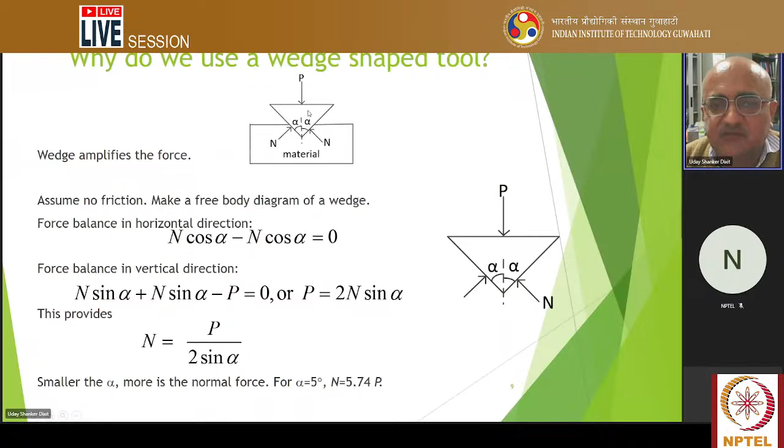This was already told to them, I think. This is syllabus and books etc. Okay, then there is lecture 1, this one. Stop sharing, okay, hide. This is about machining definition, additive, subtractive. Our focus is on machining. Then we are telling that the cutting tool is a wedge shape tool, like a wedge. Why do we make it a wedge shape? So that the force gets amplified. I am putting this one.

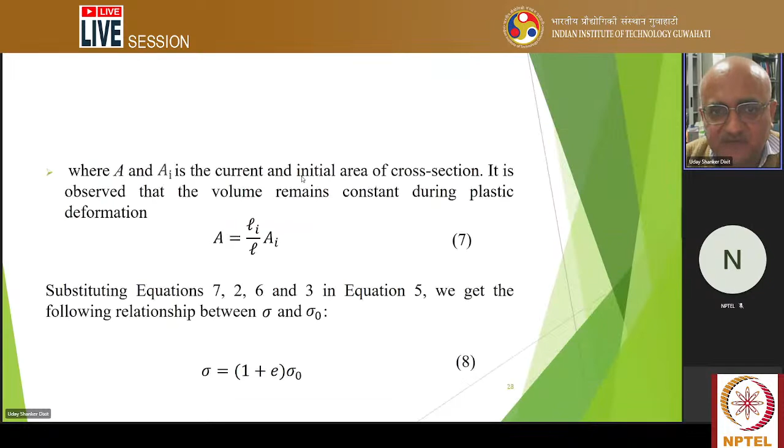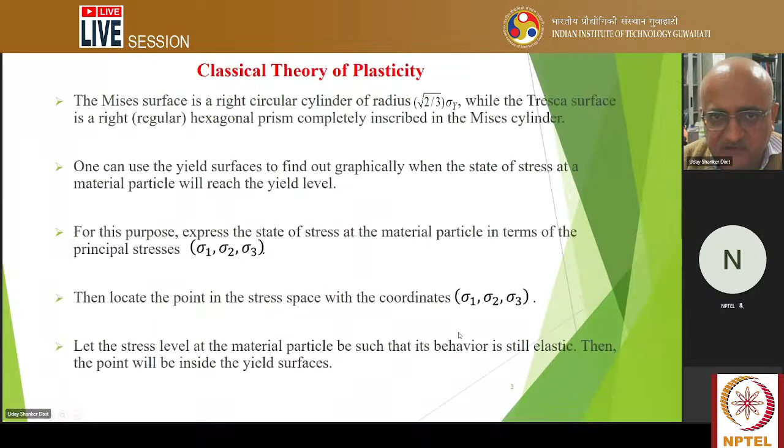What is mechanics? Yeah, this type of thing, how you change engineering strain to true strain. This type of formula has already been covered, and they have done an assignment based on this. Right. So this is one thing. Then we go to lecture 2. In lecture 2, it was about some basic concepts of plastic deformation, because naturally it is taking plastic deformation only. Okay, so plastic deformation is like this. Dislocation, screw dislocation. This is what has been covered there. So then finally lecture 3. Lecture 3 has been covered.

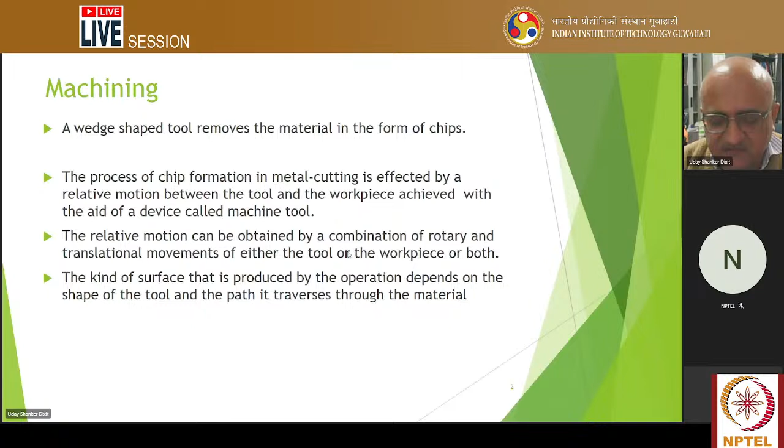Machining classes. This is single point, multi point, straight turning, broaching tool. Then this is the concept of generatrix and directrix. Because suppose you have got a tool, and the tool is moving in this direction, and the feed motion is here. That means generation motion. That means cutting velocity is along this direction, and feed is along this direction. Then it is moving, and it will make this type of surface.

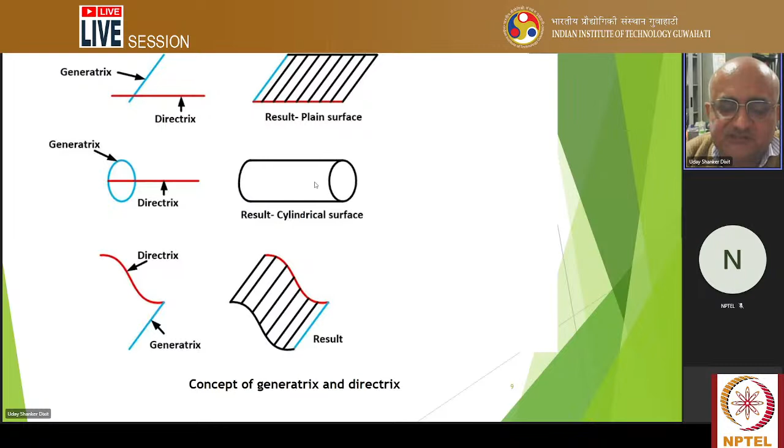Similarly, my tool can move in a circular path. Actually, the tool may remain stationary, but the whole thing will be moving, so it is like a circular path. And simultaneously, you are giving the feed by means of directrix. So then you are getting a cylindrical one. And the direction of line motion is in this direction. And this is inclination angle. It is inclined here, so the cutting edge is inclined with this direction, basically the y direction. That means this is the velocity.

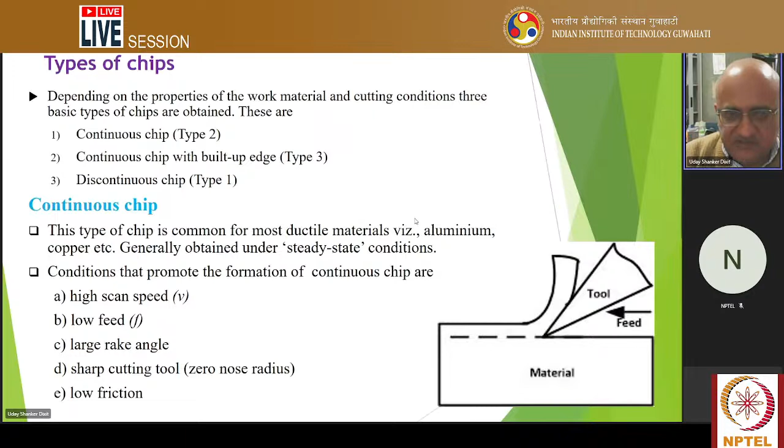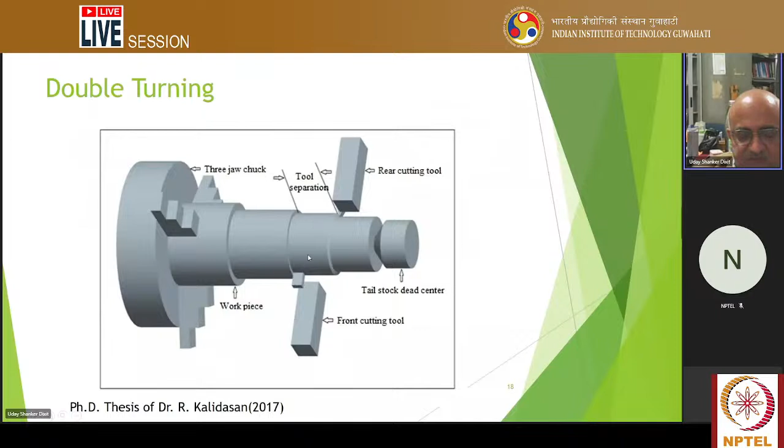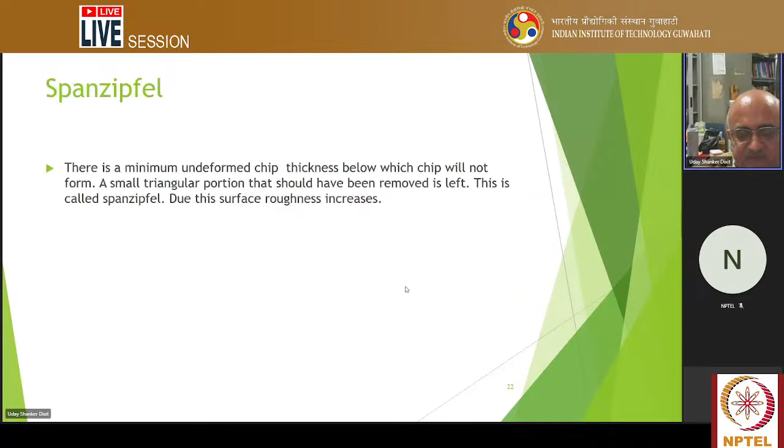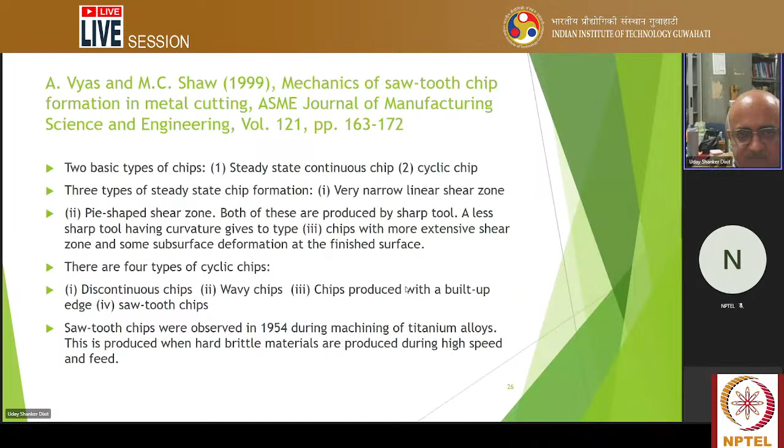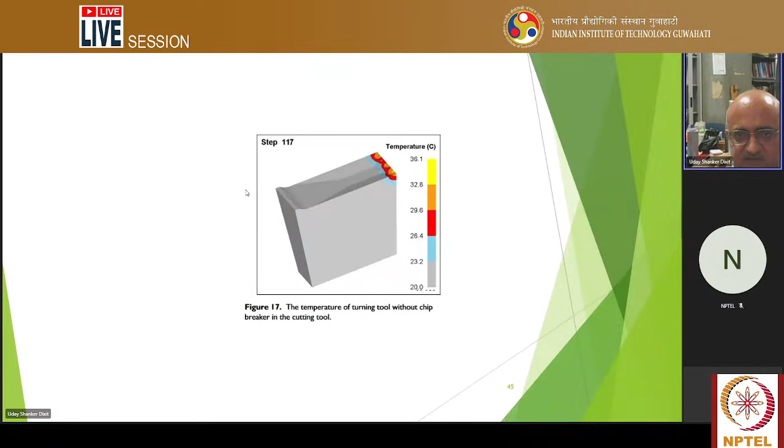Okay, this is lecture 3. Then similarly we can go to lecture 4.

That is about tool geometry, very important because understanding the geometry. But let me meantime see if there is any question. If there is any question, then we can answer. Okay, no, there is no question, but there are maybe two or three persons here. Okay, similarly here, nobody had joined from the main one.

This is tool geometry. Tool geometry is this one.

We are cutting basically by single point cutting tool. These are carbon fibers, cutting speed, and you are cutting like this. Composite material can also be cut. So that's what we are showing here. That is cutting speed.

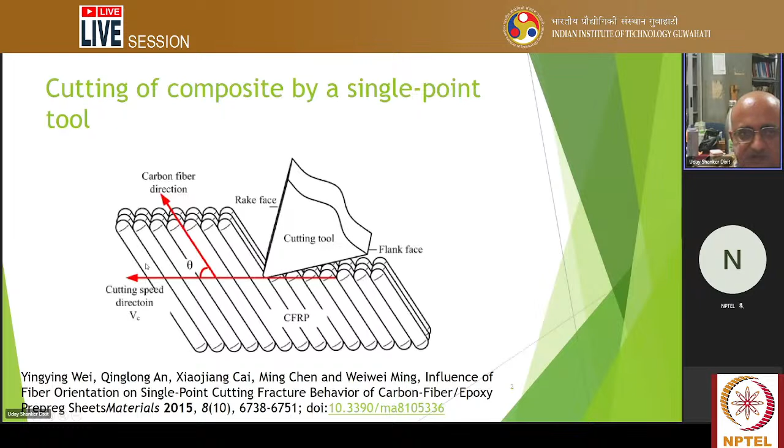This is the rake face. In the rake face, you get a crater wear. Crater means basically a pit, gadha. So that means this is created by this one.

Sharp cutting edge is this. One point has to be seen: this is called single point cutting edge, because primarily this edge is cutting, the other edge is not cutting actually. So here if we say this is the main side cutting edge, this one, and this is the end cutting edge, then we can say this is the flank wear.

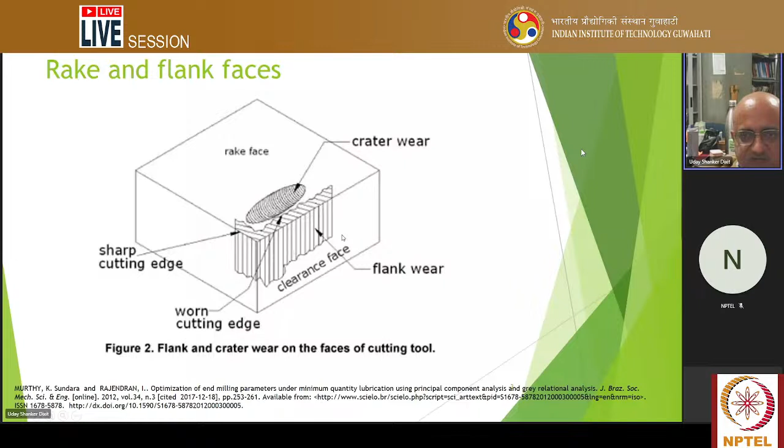Suppose primarily only one edge is cutting, then it is single point cutting. But if both edges are participating, then it is not fully single point turning. Maybe with assumption you can say it is like that. And the flank wear you get on that flank surface. That's what you are getting: crater wear and flank wear.

So now we have the principal cutting edge, main cutting edge, and this is the auxiliary cutting edge. This is the auxiliary flank face, and this is the principal flank face. Flank means side, and nose and shank and all those type of things.

You make 3 views so that you can show the 6 angles and 1 nose radius. So nose radius will appear in the top view. Top view you have got, and this is side cutting edge, and this is end cutting edge, and this is end relief angle. This is back rake angle.

This is side rake angle, and this is side relief angle here. Side relief angle, it is just going a little bit down. That's why you are getting like that.

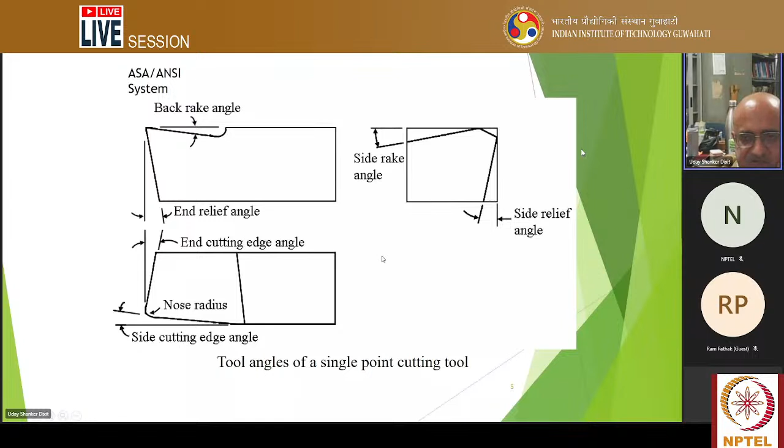So we make tool signature. In the tool signature, we have to show all these things: back rake angle, side rake angle, end relief angle, side relief angle, end cutting edge angle, side cutting edge angle, and we get nose radius. This is as per American Standards Association.

And in the orthogonal system, we have a different system. First, we take one reference plane. Reference plane is perpendicular to the velocity vector, that means it is this one. And cutting plane is that plane which contains the cutting edge, that is, the cutting edge is contained in that.

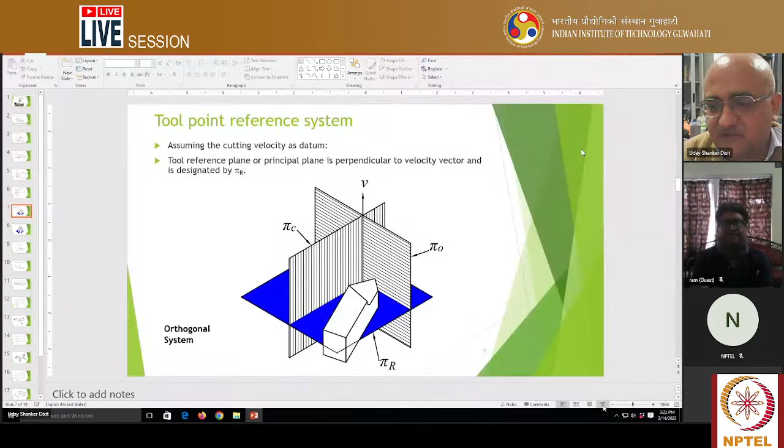Okay, here you have this one, orthogonal system. This is oblique or normal reference system. So in oblique system, one plane will be the cutting plane - that means it contains the cutting edge, but also contains that plane which is normal to the cutting edge. So therefore there are some differences. I have already taught you in the video about the angle conversion from one system to the other system.

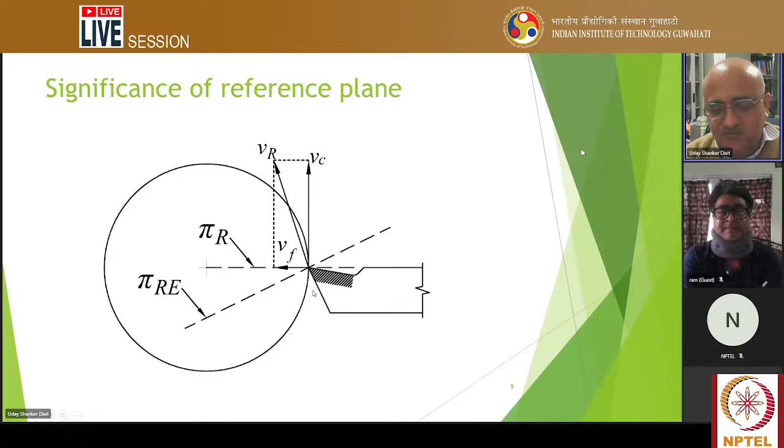Here I am highlighting that suppose precisely if cutting velocity is this, but you have some feed velocity also, then the resultant velocity will be like this. Actually the reference plane we say like this, but the effective reference plane becomes like this because it is perpendicular, so some difference is there. Some amount of change in the rake angle occurs if you set the tool above the center or below the center also. That type of thing is also there - that's what I have illustrated here.

Okay, so we are having the tool nomenclature system, but in each system you have to have 6 angles, and nose radius is common. So nose radius is common, right?

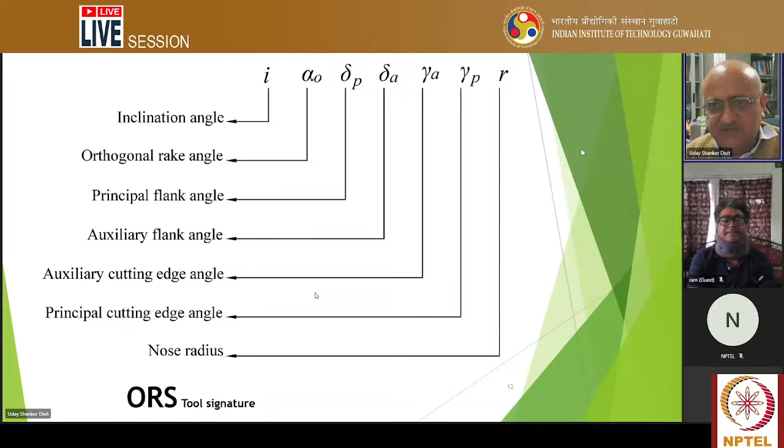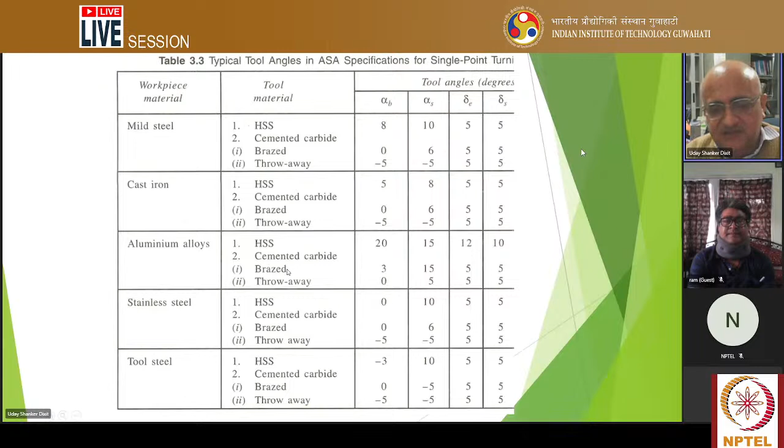This is the maximum rake angle system, because in the ASA system you have got side rake and back rake, but the maximum rake will be different actually. That maximum is in the direction where you get the maximum slope. So that formula also I have written to you, and these are just typical angles in different materials. This has also been covered - this much was covered up to lecture 4.

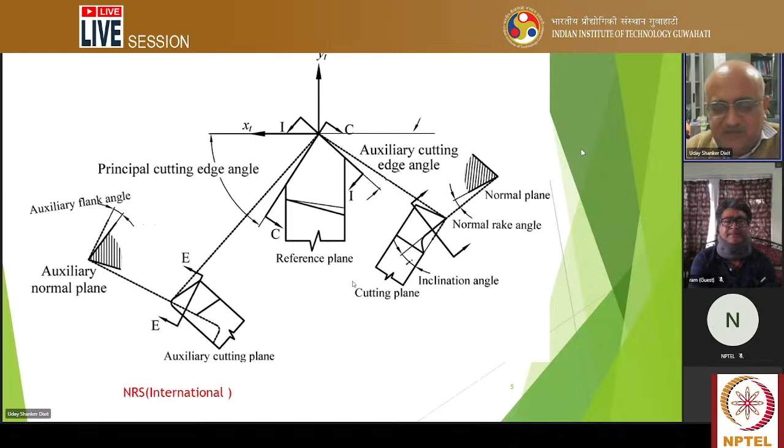Let me just go to lecture 5. I summarized that in the video, and then you can ask any question here. Conversion of two angles - how to convert the two angles? ORS, the maximum rake system, is the British system. NRS is called the international system. Although it is called the international system, practically everybody now follows the American type of system, which is more common, but you may have some books or something. So that's what I am showing - different types of relations.

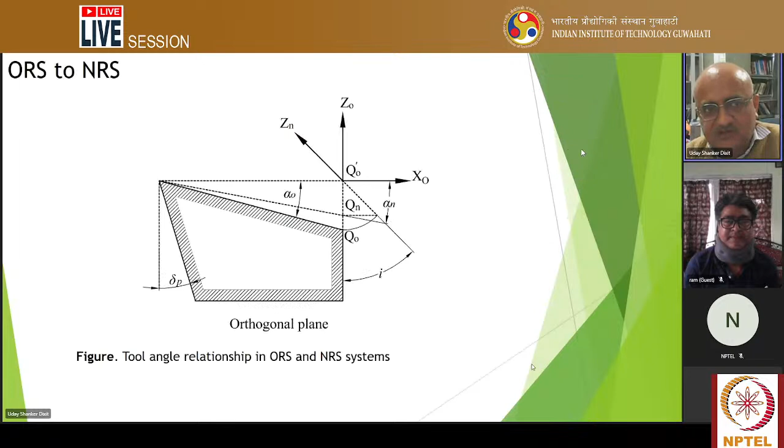Tan I is equal to this one - say suppose converting one system to the other system. Inclination angle, how do you find out from here? In orthogonal machining, inclination angle will be 0. ORS to normal rake system - normal rake angle tan alpha n is equal to cos I into tan alpha o. These are the formulae, and of course there is some mathematics, trigonometry involved.

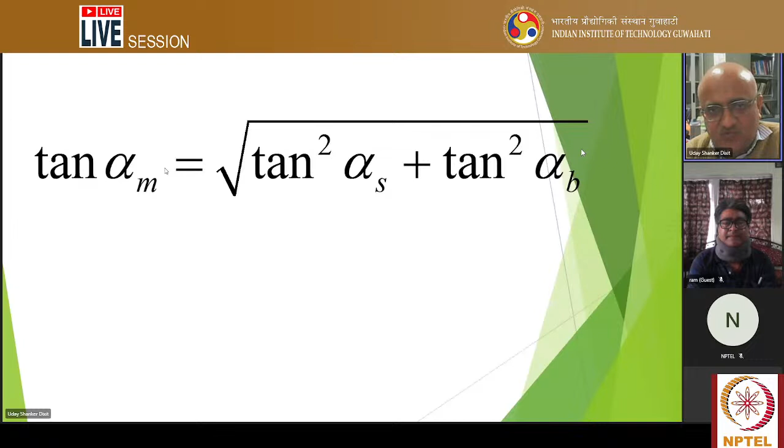This is the maximum rake angle: tan alpha m is equal to under root of tan square alpha s plus tan square alpha b - that is side rake angle square plus back rake angle square. These two things are very important, and this is what it goes to.

Yes sir. Sir, in cutting insert, if you see the cutting insert, we cannot find - meaning the tool geometry is not like the conventional single point cutting tool. You mean to say there are some grooves and something like that? In the insert? Yes, insert.

No, basic things are same, but they may have some little additional things also - basic angles are there. But what happens is the insert has to be mounted, and after mounting you have to see the angle. The tool may be anything, but it depends on how you have mounted it. But as such, angles are not able to be seen probably because some of those angles will be very small - say for example side rake angle may be 0 actually, so it will not be visible to you. Is it not?

But anyway, let us go to that. Now I am going to lecture 6. I have covered, and let me just show you, lecture 6 up to 11 we have covered. This is mechanics of orthogonal cutting, very basic. In practice we don't do that type of cutting, but we are just showing that.

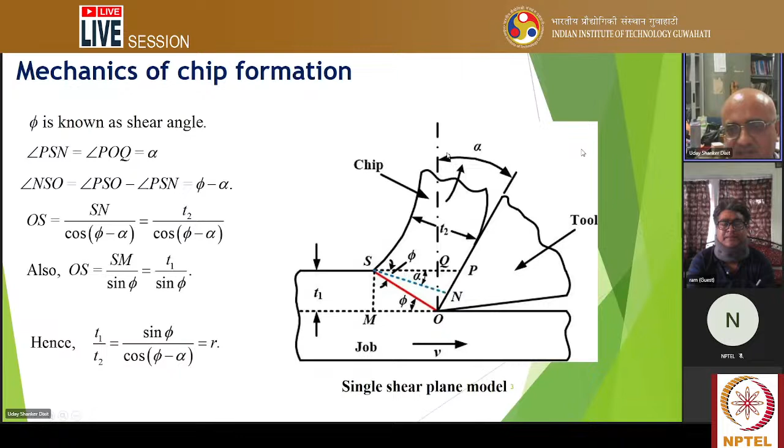Now maybe you may have some tool where this edge may not be completely straight, it may be inclined, and such variations can be there. But the basic thing will remain that this surface has to be inclined with respect to the perpendicular to the cutting velocity. And then you have this one and this, the chip thickness.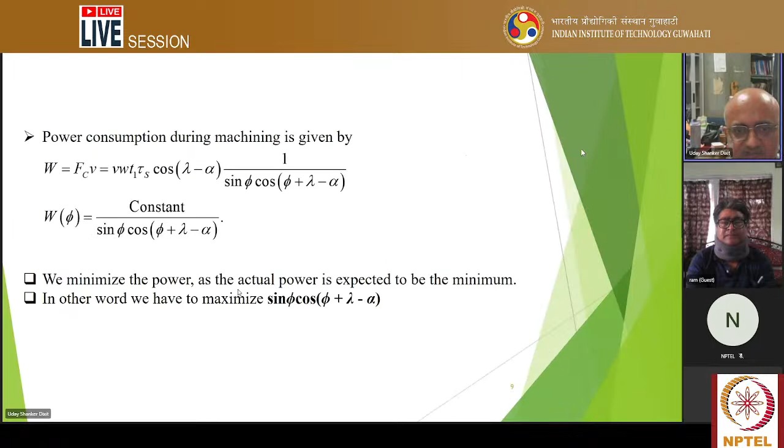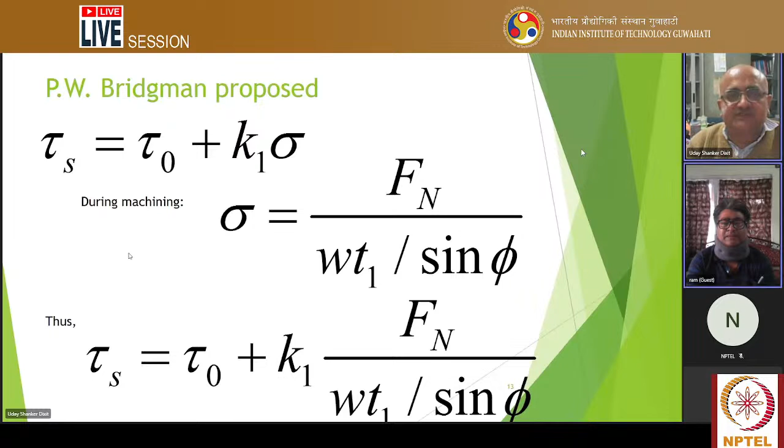So this type of thing was also told, and we have told about Merchant's analysis. This is actually a very approximate model. But Merchant's second analysis was like this: Bridgman said that it is also dependent on how much normal stress is there. That means the stress will change with the normal stress. So he gave this formula. With that, some changes take place, and that analysis has been done. I am not going to repeat that.

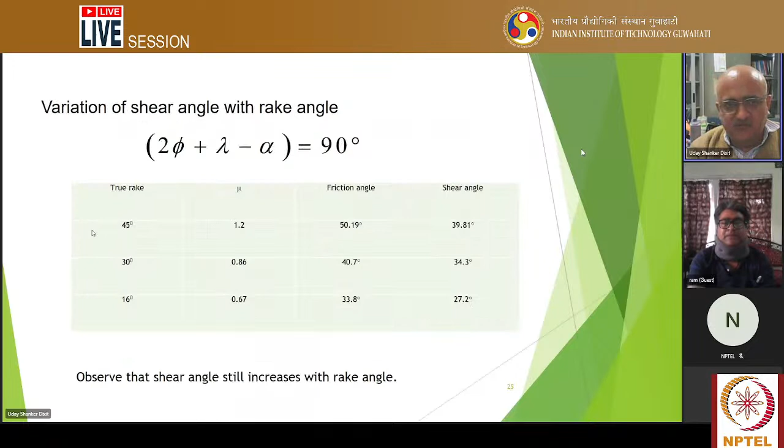These are the problems, okay, cutting force and this one. These are the F by N ratio. We assume Coulomb's coefficient of friction, but in practice it's just an approximation because Coulomb's law is not valid there. Still, we assume that ratio, average force equals tangential force, and this is average normal.

Now this is a very important point, Pathak ji, pay attention to this. I have asked many people, when they are doing turning, whether the feed is affecting the chip thickness or depth of cut. Many people think, because this has been given, that depth of cut is affecting the chip thickness, but it is not so, because cutting is being done like this, in this type of direction.

You just see, therefore T1 is proportional to feed into cosine psi, where psi is the side cutting edge angle. That means you can observe and measure the chip thickness. You will see that basically the chip thickness increases when you increase the feed. Depth of cut is not dependent that much; depth of cut will affect the chip width actually. So this point is very, very important here.

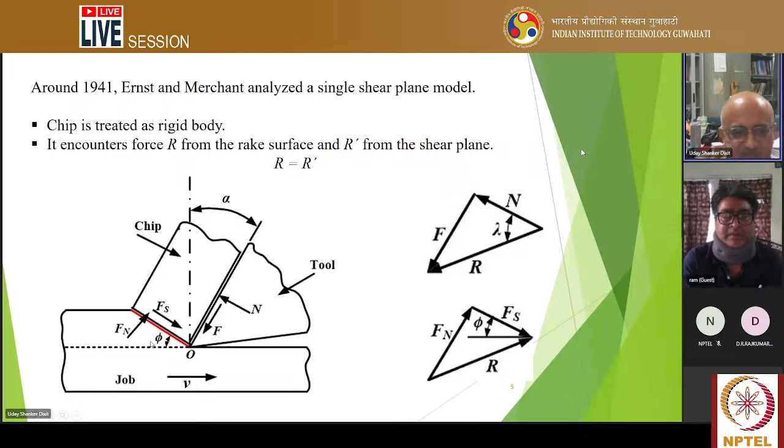So they think that in turning also the depth of cut will decide the chip thickness. But it is not that. Depth of cut doesn't decide the chip thickness; depth of cut will decide the width. That's why this diagram is made here, and these are the conditions for orthogonal machining, and this is feed force and radial force.

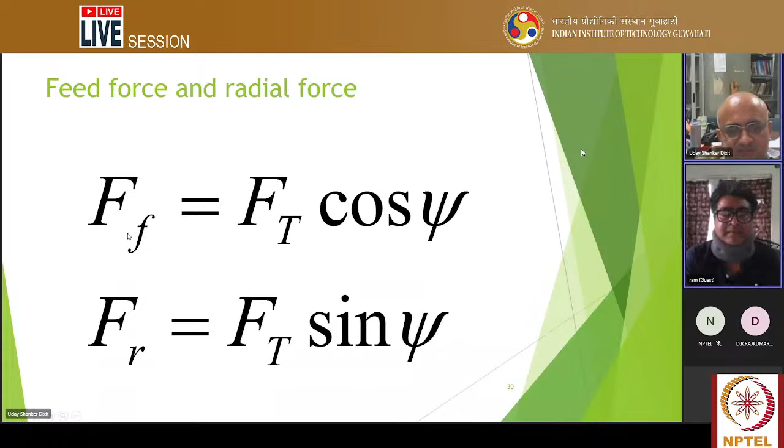So if you are getting thrust force on the cutting edge, we can say that feed force is equal to Ft cos psi and radial force is equal to Ft sin psi. Okay. So this was told in this lecture.

So let me see in YouTube if there is any question. Yeah, Mahmood has already asked a question, and he's from industry. Okay, there are many people watching now. Okay, no problem. YouTube is also where people are watching. Fine. Now I will go to this one.

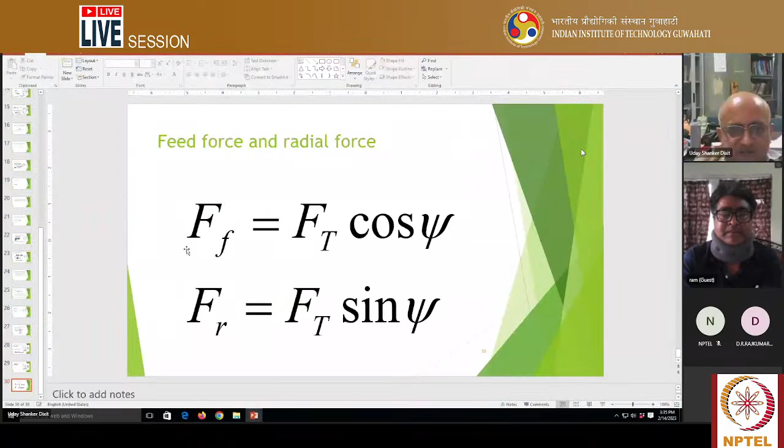Up to 6th we have told? Yes, 6th has been told. And then we have to go to the 7th lecture. This also has been covered. Strain and stresses in orthogonal machining. Force divided by area gives average stress. So here coefficient of friction mu is equal to tan lambda, the friction angle, F by N, and this is how you are getting it.

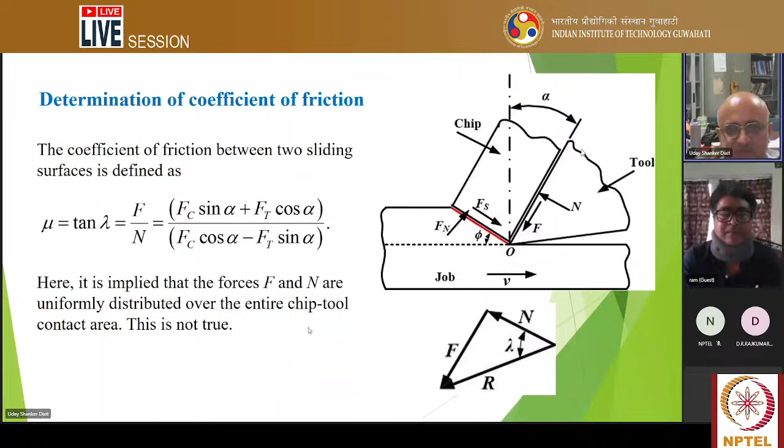And force, but actually they are not uniformly distributed. In practice, you will get this type of situation. Suppose this is the cutting point, and this is the rake surface. Normal stress keeps on decreasing like this, and shear stress remains here. Here the shear stress is very high, but it cannot increase beyond the shear yield stress of the material. So there it saturates, and in this zone it doesn't follow Coulomb's law.

Rather, the shear stress remains constant. It is no longer proportional to normal stress. But after this point, shear stress is proportional to normal stress. So shear stress is actually changing like that. But in a simple model we do not do that type of analysis. We just take average shear stress and normal stress. But this is what one has to remember.

Normally, when normal force increases, friction force also increases. That's what we have studied in school, Coulomb's law, class 8 to 12. But it is true up to a certain limit, when normal force is not very high. The moment normal force becomes very high, there comes a limit, and after that everything becomes flat. You keep increasing normal force, but the friction force will remain the same.

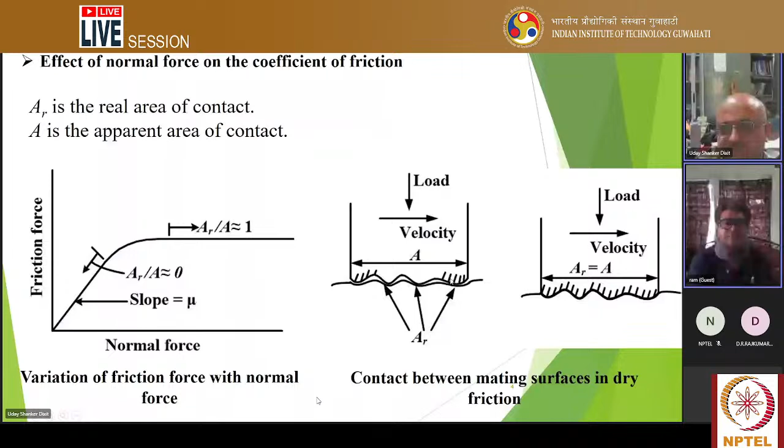And in between there is a transition zone. So that is the situation. There is one Wanheim and Bay friction model that captures this type of phenomena. So this type of thing was told. And then another aspect is there. This is just the basic nature dependent on the load.

Another thing is that friction may depend on the cutting velocity. So F equals F0 Vc to the power p, where p is negative, say minus 0.07. As velocity increases, the friction force decreases.

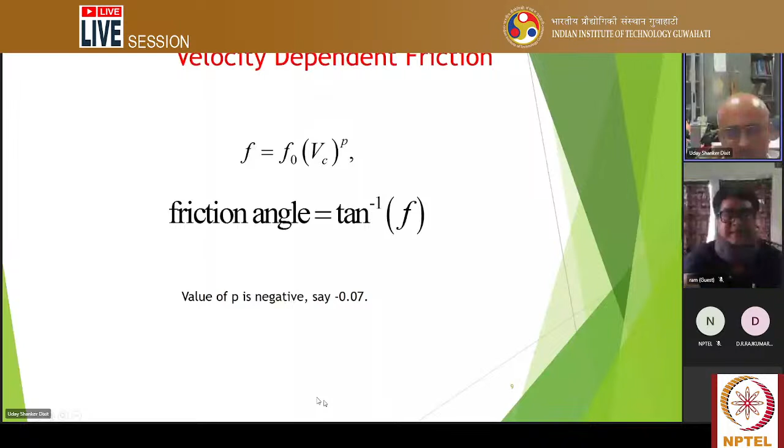Okay, let me just see if it is going on. Okay, fine. So any question? Dr. R. Rajkumar also has joined. Now let me see in YouTube. Anybody asking anything? Yeah, they are watching, but no question till now.

Okay, so up to here we have done. Friction dependency, friction angle, determination of stresses. Shear stress is Fs divided by As. You find Fs by the formula: if you measure the cutting force and thrust force through a dynamometer, divide by the area bt by sin phi, you get the shear stress, and normal stress similarly. So roughly you will get an idea.

And shear strain will be cot phi plus tan of phi minus alpha. Now remember, alpha is the exact rake angle, which is known to you. But phi is just an approximation. You cannot measure it directly.

Unless you put a very high arrangement and you put the camera and then you do some machining, then you stop the machining, then you can measure the phi. But the phi is not measured. Moreover, don't think that the cutting takes place at a line. It will be very blurred, that type of thing. But still we assume that on an average it goes like that. So phi we find out indirectly by measuring the chip thickness, etc.

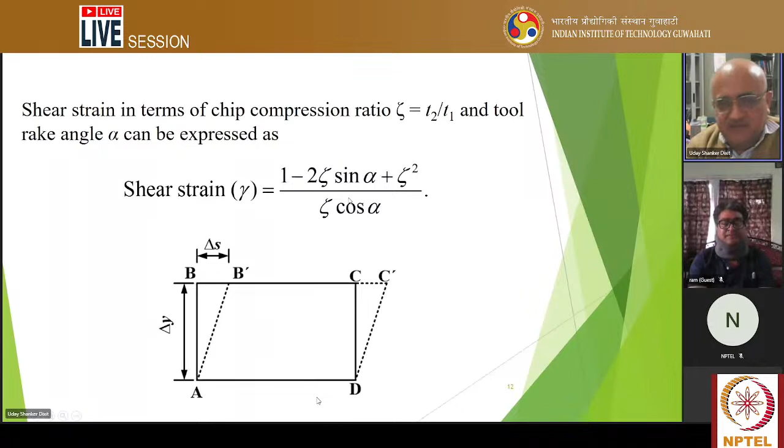And then shear strain is given in terms of the chip compression ratio. Chip compression ratio is the opposite of cutting ratio. So cutting ratio is T1 by T2 and the chip compression ratio is T2 by T1. Tool rake angle alpha can be expressed as this one, and this is the shear strain. So if the chip compression ratio is known to you, then you can find out shear strain. So here this expression has been given, and you can see the shear strain.

Suppose I keep on increasing the rake angle, then my shear strain decreases because of minus alpha. And if the shear strain is decreasing, in a way it is good also, because you want to cut the material. You don't want to create much strain actually. It is not metal forming where you want strain and that will be useful for you. That material is gone. So any cutting process which cuts without producing any strain is better. But minimum strain will always be there. So we are showing how we find out the expression for this.

This is shear strain rate. Shear strain rate unit is per second. So here we assume that the separation between two successive planes is 25 into 10 to the power minus 4. So shear strain rate comes out of the order of 10 to the power 5 per second. In a tensile test, the shear strain rate is 10 to the power minus 3 per second. That slowly you consider. And if an impact test is there, then it will be 10 to the power 3 per second, 1000 per second. That much we can get.

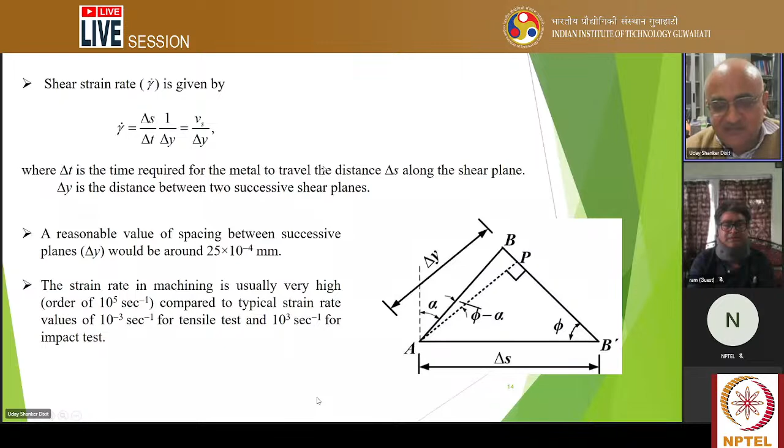But here it is claimed that it is 10 to the power 5. Some researchers I have indicated don't agree to this; they said no, strain in metal cutting is not very high. So if anybody wants to do fundamental research, still this area is open. Anybody can do research here. They just said that in metal the delta Y plane spacing is this much and put that, but nobody is actually seeing that thing. Either you need a very sophisticated instrument and you have to realize the whole cutting process. That is why the scope is very much there.

Chip velocity, shear velocity, this much also has been told. And then this paper I told about has still not come in the textbooks, but it is a paper worth reading. It was published in a very reputed journal, International Journal of Mechanical Sciences, in 2005. It is a very big paper, but very easy to understand. He said what are the problems with the single shear plane model, assuming that the cutting is taking place like this.

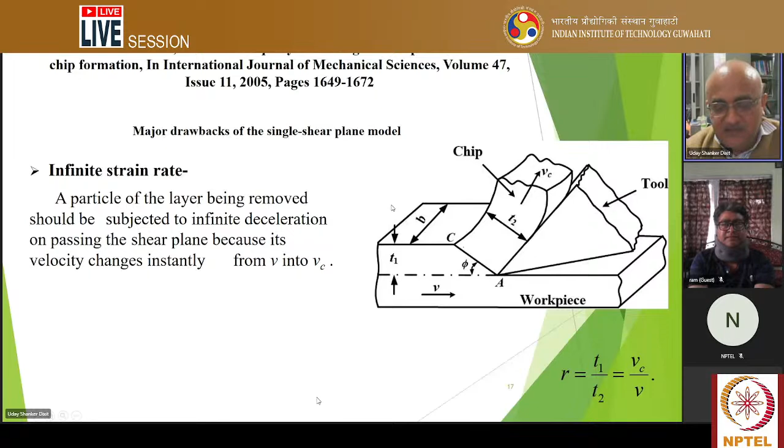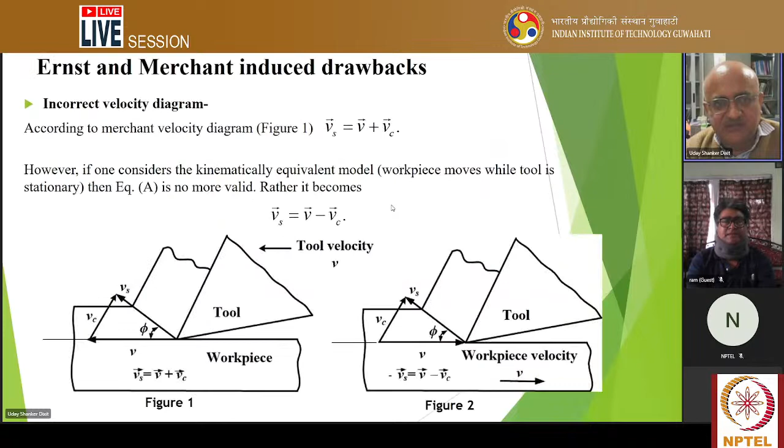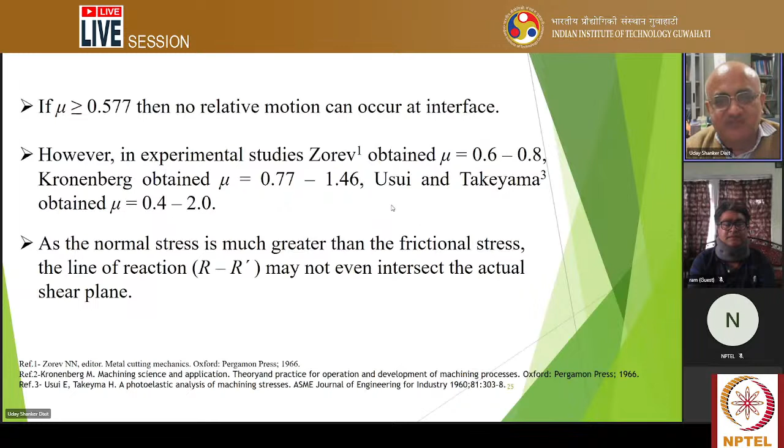He said that it will produce infinite strain rate and unrealistically high shear strain and shear strain rate, and the behavior of the work material is also not proper. He showed a lot of drawbacks, which are contained in the video. And he's saying that the force diagram is also incorrect. And the type of friction model we generally take, although mu should not be greater than 0.577, but in machining generally we take mu very high. So he is supporting those ideas.

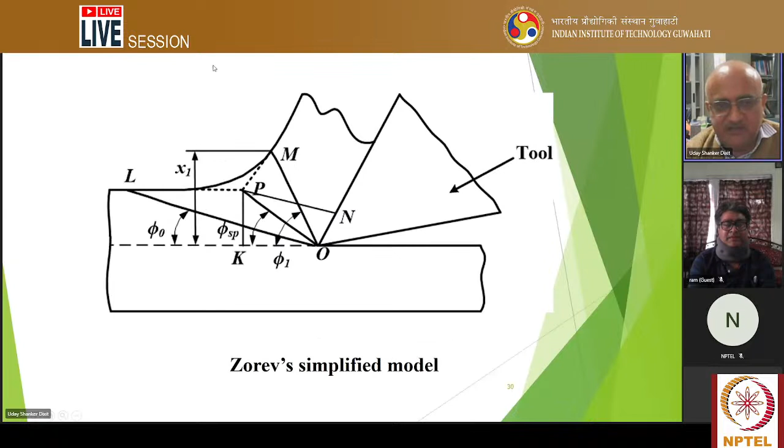Constant friction coefficient, obviously it cannot be constant. There were other people also who did this, like the Briggs model. There he said that cutting is taking place like a fan, in this zone. There is no shear plane, rather there is a zone. And Zorev said that the zone is like this. This is the Zorev model. Then the Zorev simplified model: this is very complicated, so you can simplify a bit and say it is like this. At least you should consider.

So this is the formula: during orthogonal machining with a zero rake angle, shear strain is given by this. Okay, that is given. So this point I have highlighted. A lot of research potential is also there.

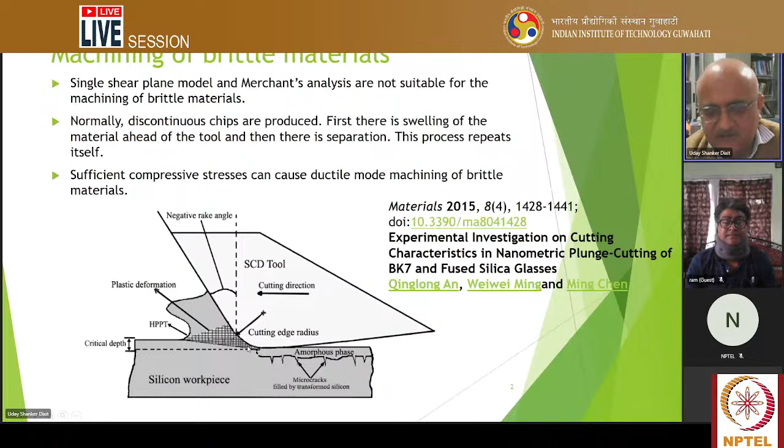If you follow Astakhov's papers, Astakhov has written many papers. He is a Russian but settled in America. He has written many things: experimental study of orthogonal cutting and other models. So there are different models; actually there will be plastic deformation in the cutting zone. So here, how to determine chip formation, how should we do that?

One is that we make circular grids. Earlier people used to do this type of thing. They will make a grid on the material, and after deformation they will see what happened to the grid. Then they used to make circles, and after deformation the circle will become an ellipse. If you want, students can still do such experiments, but this type of research was very popular in the 1970s. Nowadays people are not doing it, but use high-speed photography. So suppose the circle becomes an ellipse, then you can find out the strain like this: E1 is equal to ln R1 by R.

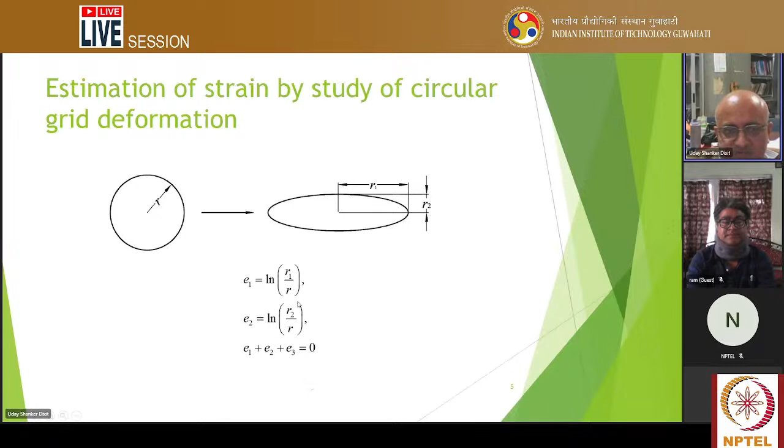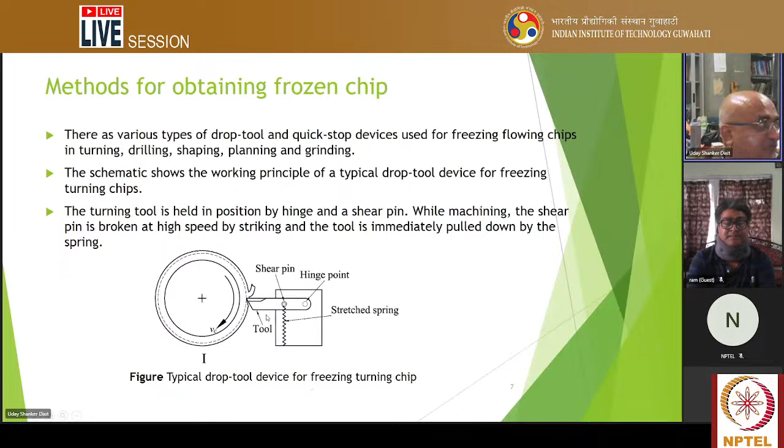Another thing is the method of frozen chip. You are doing cutting and suddenly you withdraw, and then see what happens, how the chip is connected. That type of experiment people have also done. Some people suddenly put a spring here, so with impact it suddenly gets broken and detached. These types of concepts are there. I'm just telling the concepts.

Here he is putting the shear pin. So you are doing machining, and suddenly the shear pin will get broken. So the workpiece and tool will get detached all of a sudden, and then you can see what happened. So these are something like quick stop tests or frozen quick stop operations.

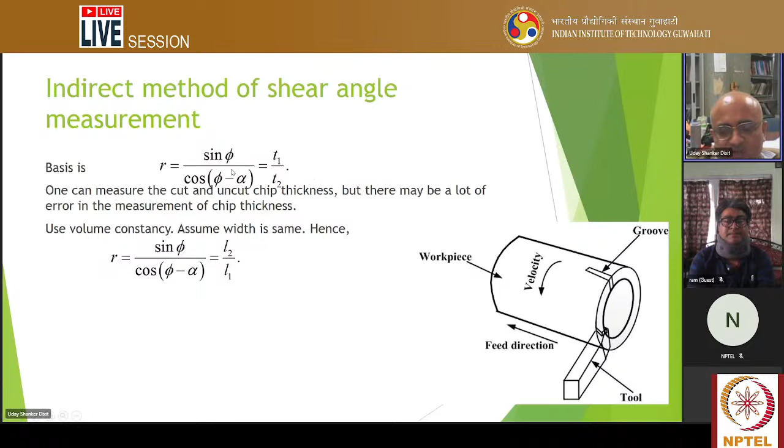An indirect method of shear angle measurement is that you measure the cutting ratio. This is called the cutting ratio, and its inverse is the chip compression ratio, that means 1 by R is equal to this one. So this is the formula. Therefore, if you know the cutting ratio and the rake angle, you can find out phi. And uncut chip thickness you can find by weight measurement also, because in plastic deformation the weight remains constant. So that method also has been told.

We are assuming that the cutting edge is very, very sharp, but the cutting edge may also vary. So Pathak ji asked whether this one is also correct. He said that when I see any tip, I am finding that these angles are somewhat different. So there may be many other features, like the edge radius. Remember, it is different from the nose radius. The nose radius you see in the top view, but from the side you can also see a radius, that is the edge radius, and it may be very small, but it has some effect on the performance.

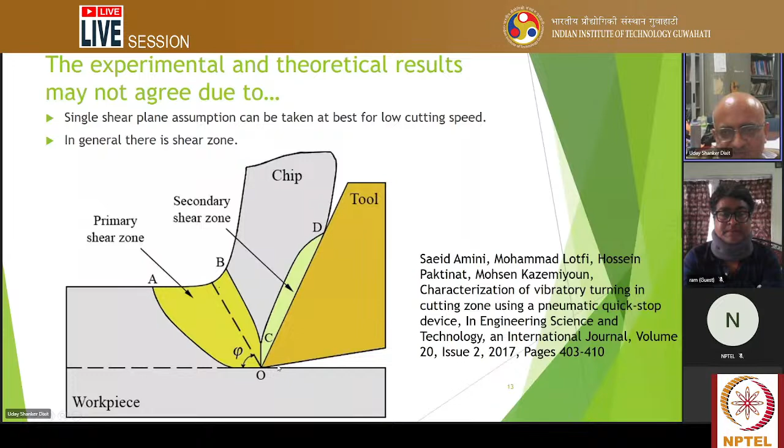And generally in this diagram, this is the primary shear zone. Actually, this is a shear zone, but you are assuming it is a shear plane, and maybe you are ignoring a lot of zone here. And this is the secondary shear zone, where the chip is sliding, and this is the tertiary shear zone, small, at the clearance. So this is the paper, and friction may not be constant at the rake surface. And Atkins' paper is also very useful.

Atkins in 2003 published a very good paper, also in the same journal, International Journal of Mechanical Sciences. Here he says that you do any machining problem by an energy approach. So there is work required for plastic deformation, work due to friction at the tool-chip-work interface, and some work to be done to separate and make a new surface, because the surface energy increases. This type of thing was not added. So he said, add the power for creating new surface, and then it will solve many problems.

I have asked some of my PhD students to do some work using that model, and it was giving good results. That means one additional parameter has increased. But again, there is a scope for research, because it is true that I added this thing and got good results, but it may just be some kind of fitting, because of two things.

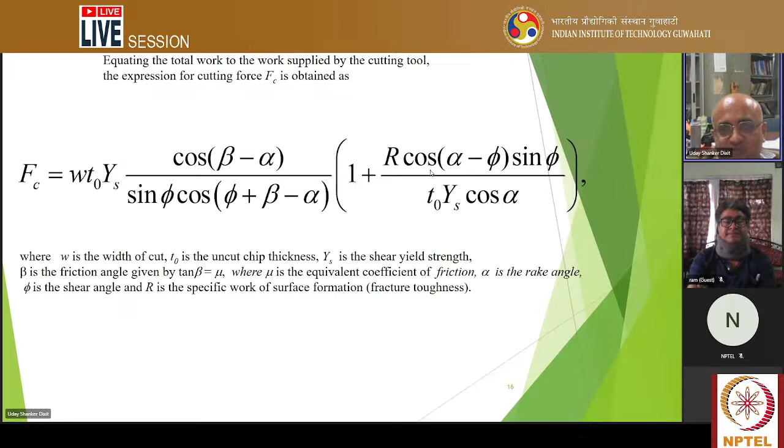Really, whether it is this surface energy coefficient or not, for that you have to do some physics study also. Then models, so energy of cutting. There are some empirical models. People said all these models, they do what? That cutting force is proportional to the feed and this one.

So here it is not this one. It is T to the power A and W to the power B. So it is not that A will be 1 and B will be 1. It may be something. Then I told slip line model. It is a general method for solving such type of problems. Nowadays, not that much popular.

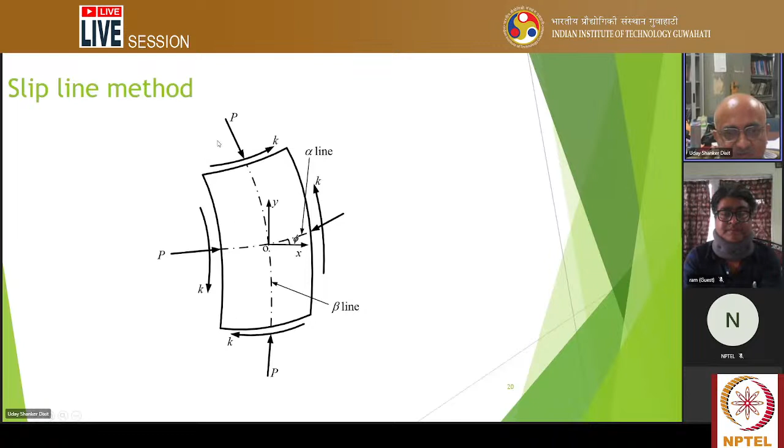Suppose you want to find out the shear stress. Okay, so shear stress K, and this is this one. So they assume that material goes along some shear lines, wherever you get maximum shear, and you get hydrostatic stress there. So something about slip line theory also I had told, which is not taught in the BTech, but I have told that you have to satisfy basically the equilibrium equation, continuity equation, and the rule of plastic flow.

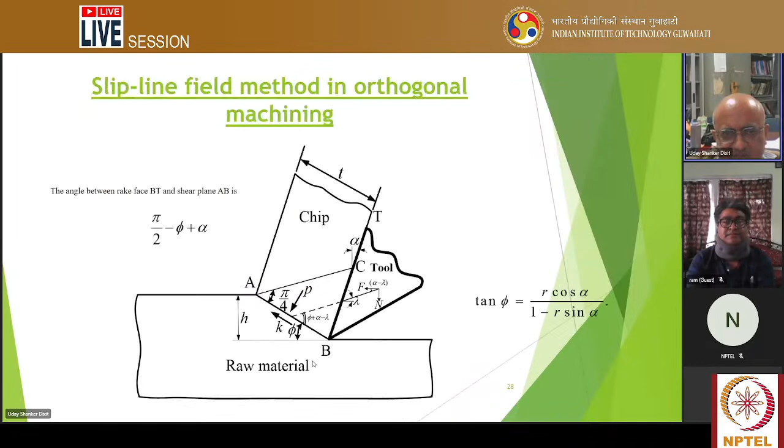Then I told how some analysis can be done based on that. This much I told in this lecture, and this was lecture 8. Then I think I have covered lecture 9. In lecture 9 I covered this topic. It is still the machining. If somebody wants to do fundamental analysis, then in machining the area is quite open, because most of the work people do, but they are not understanding the mechanics.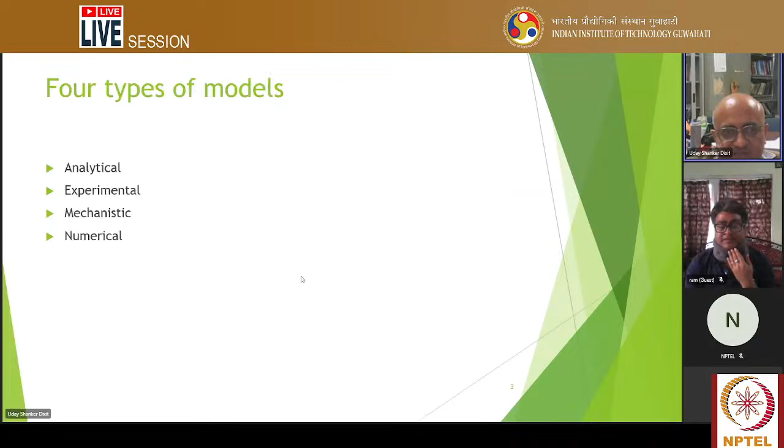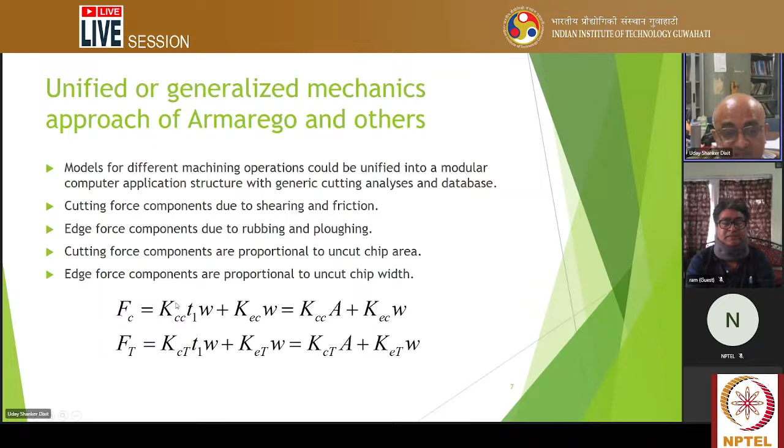Main objective of metal cutting. So other analysis: analytical, experimental, mechanistic, numerical. Like slip line field theory. These type of things are slip line theory. They can take strain hardening also. But mechanistic model, there they say that FC is equal to something semi-empirical: KCC times T1W plus KEC times W, means this is the edge coefficient and this is the other cutting coefficient, but these may be dependent on the geometry.

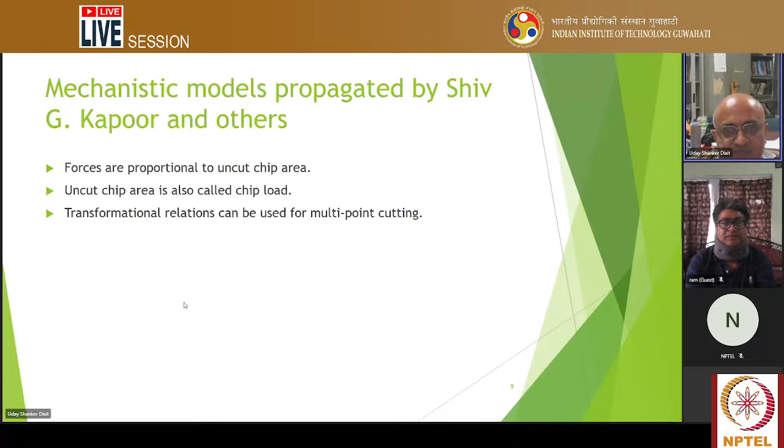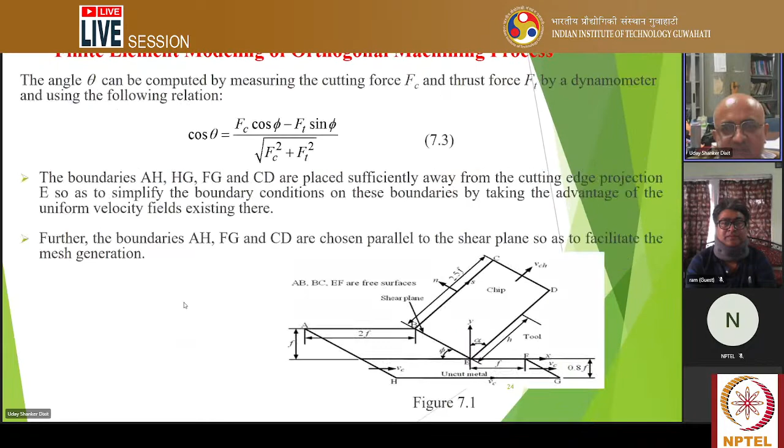So there is some mathematics here and something you have to do by experiment. That is why they are called mechanistic model. Then energy approach, and this is power due to friction, finite element modeling. This type of research also can be done, but now people are trying to do finite element. That's why this type of research has become somewhat less. Yes, but finite element also is not so easy.

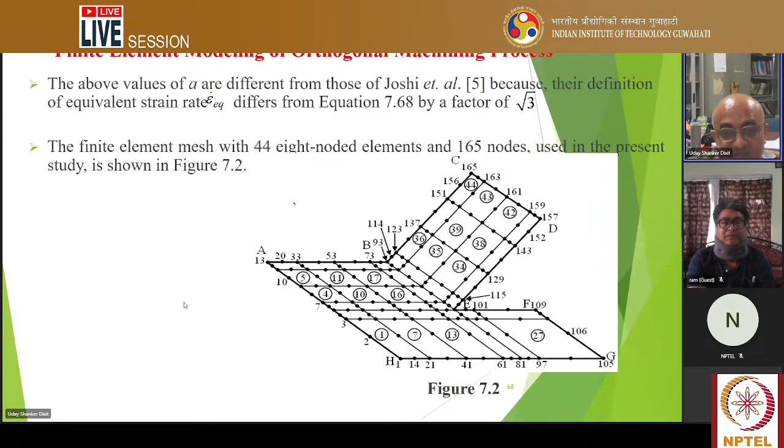I have told some theory about the finite element formulation in this lecture, which I will not repeat, but what I am telling is that nowadays you use packages. In the packages, automatically the things are done. But it may take much time actually, maybe 8 hours, 9 hours, and you will not get result. So you have to put some effort. It is not so easy that within seconds you will get answer.

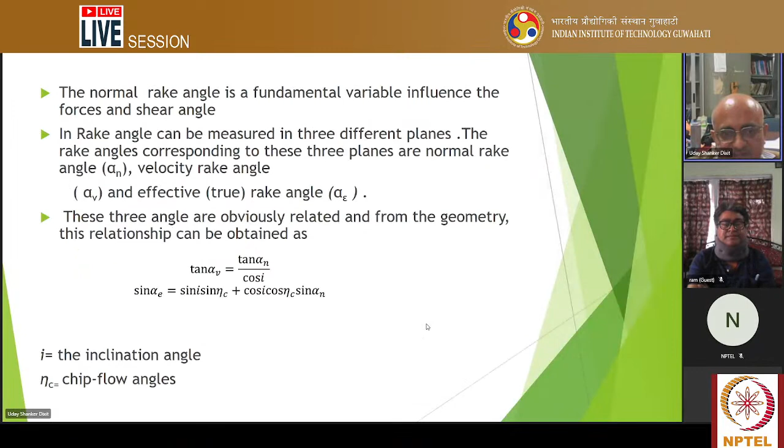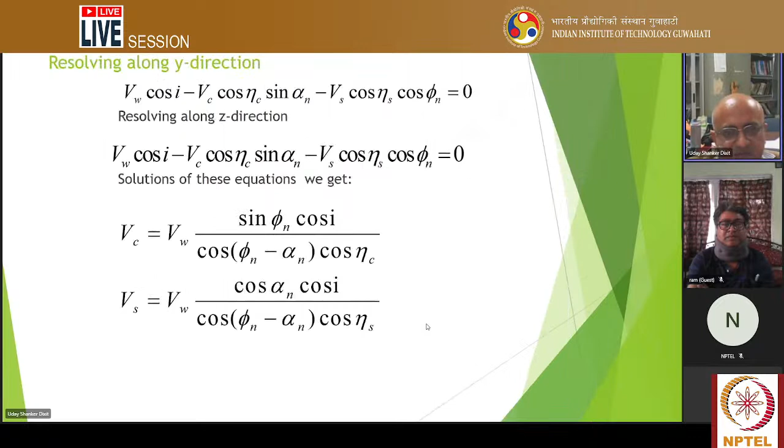And so this is mechanics of oblique cutting. Oblique cutting means it is at an angle. So in oblique cutting, you get some other type of ratios that I have explained here. In oblique cutting, basically it is a 3-dimensional cutting. So I would say this is the most difficult chapter of the whole course. Because why? Because you have to visualize 3D things also. Even though I have tried to explain each and everything, you have to visualize.

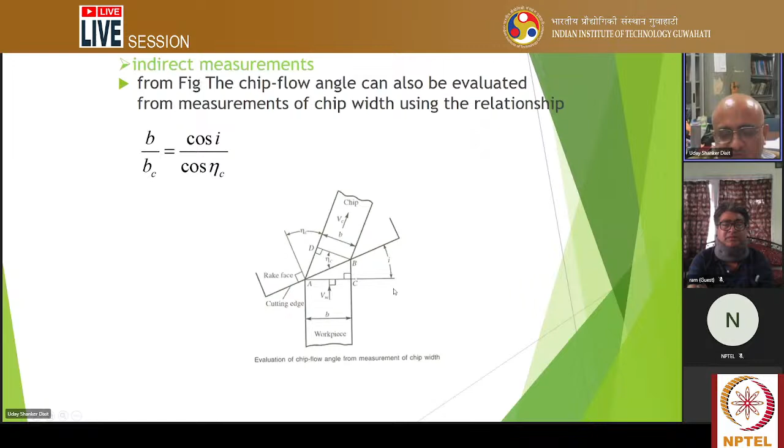Maybe you have to make your own model, and then measurement of chip flow direction. Indirect measurement, direct measurement. Chip flow is also not straight, perpendicular to this one. So chip flow angle is also there. Sometimes people make the assumption that inclination angle is equal to chip flow angle, and finally we had done measurement of cutting forces.

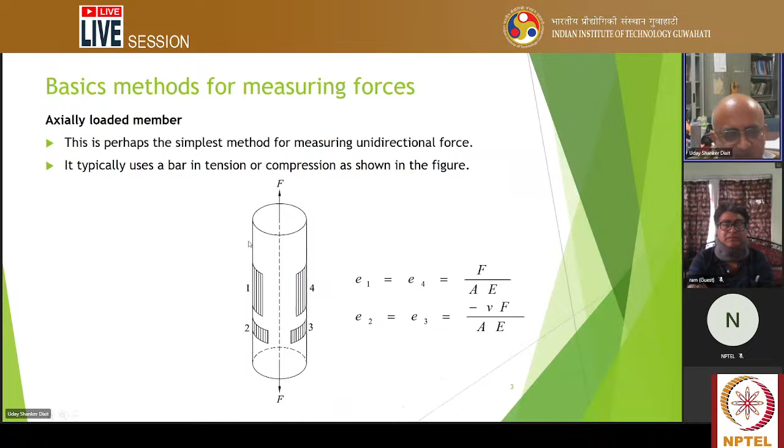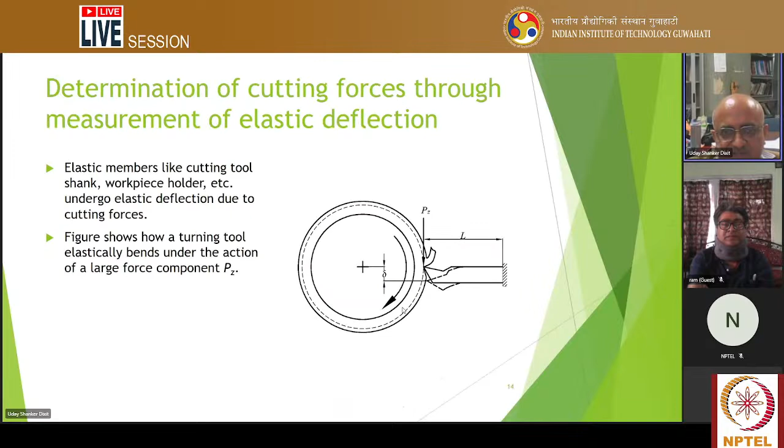Now these type of methods, even today people can use, strain gauges, etc. But now Kistler dynamometer has become very famous. Earlier they used the ring type of thing, that if you want to measure the force, just deform the ring, and here you put the strain gauges. It becomes ellipse, and ultimately you have to use Wheatstone bridge actually. So this is something I have told.

And you can have simple spring type, cantilever type thing also, and you can put the strain gauges here, and this is Kistler's dynamometer. It uses piezoelectric thing.

So since it uses a piezoelectric element, it will be very accurate compared to strain gauges. Strain gauges also are not so easy. I have said strain gauge, but you know, if you do not fix it properly, you will get wrong readings. Okay. So here also, it is a very sensitive instrument.

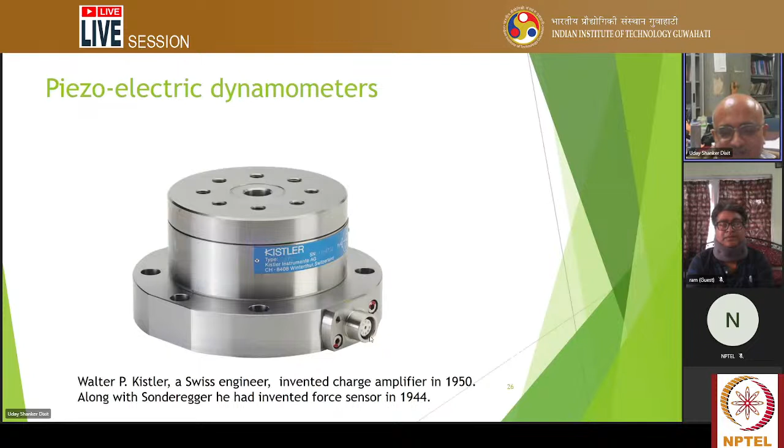Once I purchased it, and because of humidity here in Guwahati, the cable got spoiled, so it was giving a lot of noise. Then the service engineer came from Singapore, put the cable in an oven, and after 1 hour it was dried. And this is the charge meter provided by them, basically a charge amplifier, because the charge is very small and has to be amplified. And these are very costly, of course.

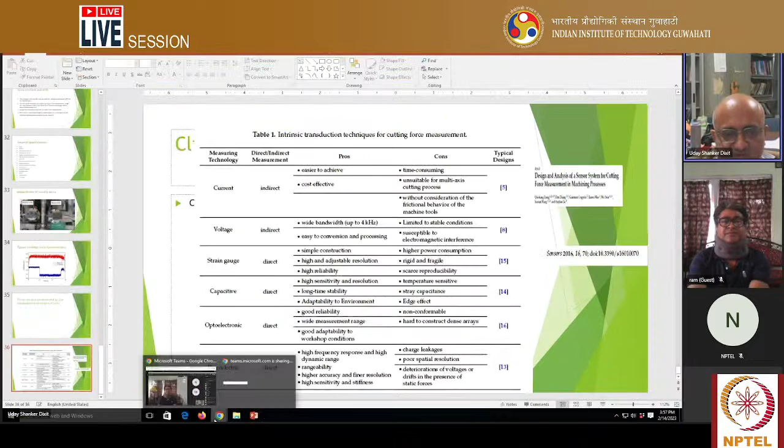So if you want to do a crude experiment, you can use strain gauges also. One student did a PhD where he put the front tool and rear tool on opposite sides, and then took the typical readings. And these are some other force measurement techniques. Many force measurement techniques are there. Somebody interested in metrology and measurement can use this type of thing also.

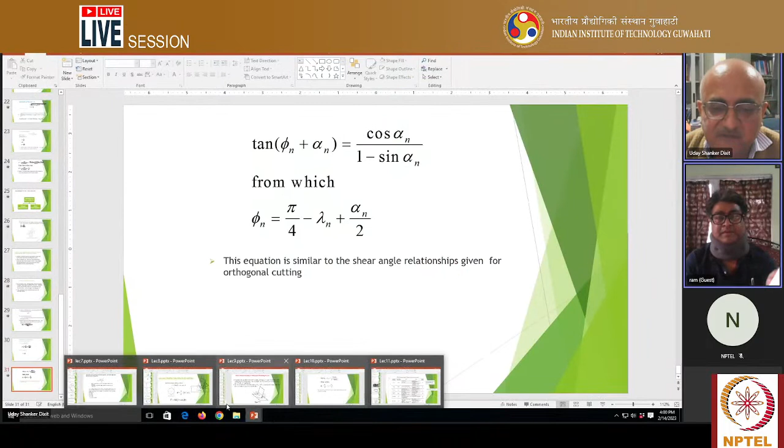Phi is the shear angle. B means width, and K means the shear strength. And FQ is equal to KBT(cot phi minus 1). Okay, so you can correct that, because both the things have to be there. Lee and Shaffer theory tells that force is proportional to K, B and T, and then cot phi minus 1 and cot phi plus 1. So you can correct that.

And then phi is equal to pi by 4 minus lambda plus alpha. So some difference is there. Shear angle is equal to pi by 4 minus (lambda minus alpha), or phi plus lambda minus alpha is equal to pi by 4. So there is a linear relation between phi and lambda minus alpha, but it is not very correct at low rake angle, that is also written, because it assumes that there is no built-up edge.

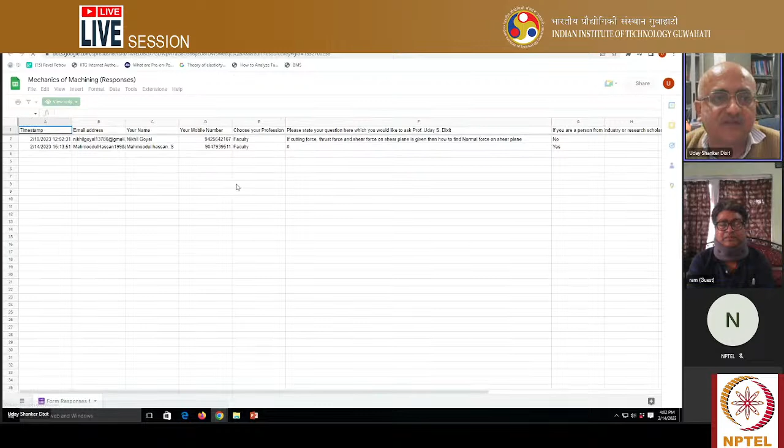You are appearing for the exam or not? I have applied. Okay. It will be based on the basic concepts, multiple choice type only. Sir, if I recover from my spondylitis, I will appear. Okay. But I made the question paper easy, with some conceptual questions and no negative marking. So easily you can get a certificate. I think you will pass. Okay, fine.